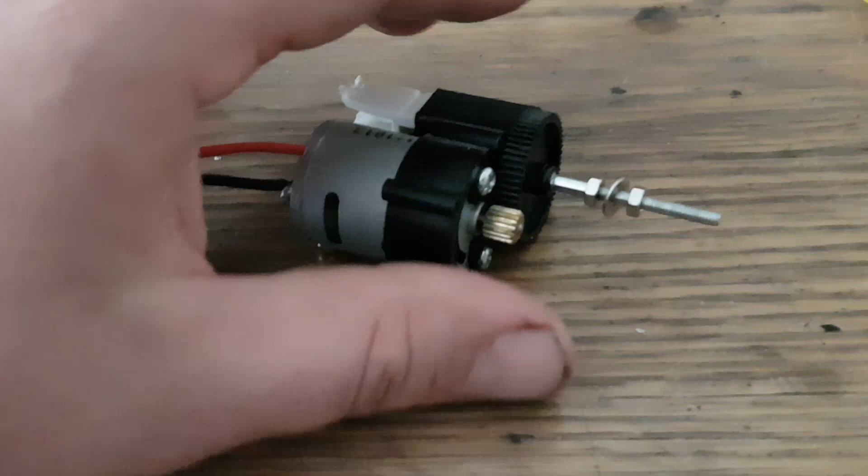Okay, so this is what we've pulled out of the plane. We've got this nasty little brushed motor. It didn't seem to have a lot of power, but I'm not entirely convinced it was the motor's issue, although the motor does have an issue - I can turn the prop at some points and the motor itself doesn't turn.

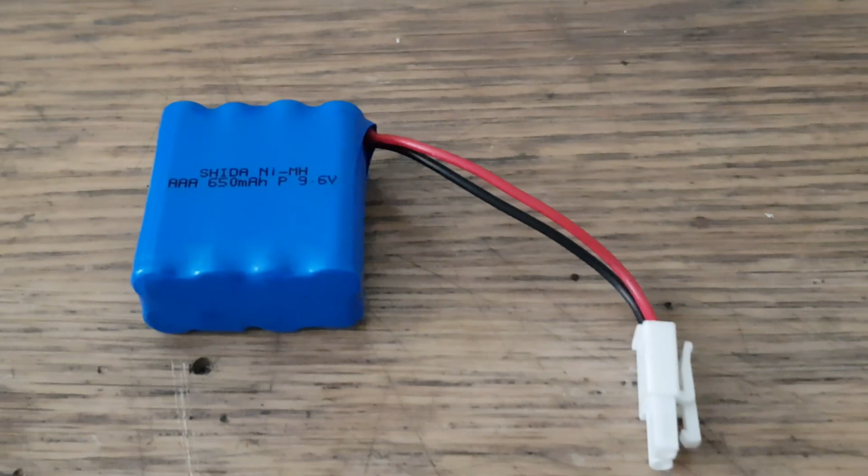Yeah, that's the massive power pack, as you can see, 650 milliamp hours. Loads and loads of time in the air - it ended up being about 5 minutes, 4.5 to 5 minutes. Yeah, bin.

Next we've got the receiver, which was, if you can see the great big long line, some 72 megahertz thing, and 5-wire servos because it had its own little autopilot. When I say autopilot, it had a board that meant you couldn't actually fly the thing at all. When we tried to fly it, it wouldn't trim, it wouldn't fly level, it wouldn't fly, it just kept crashing all the time. So yeah, bin.

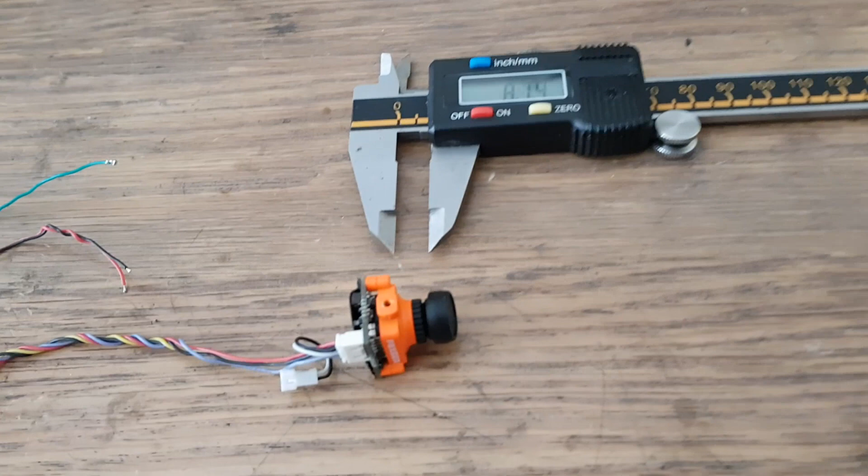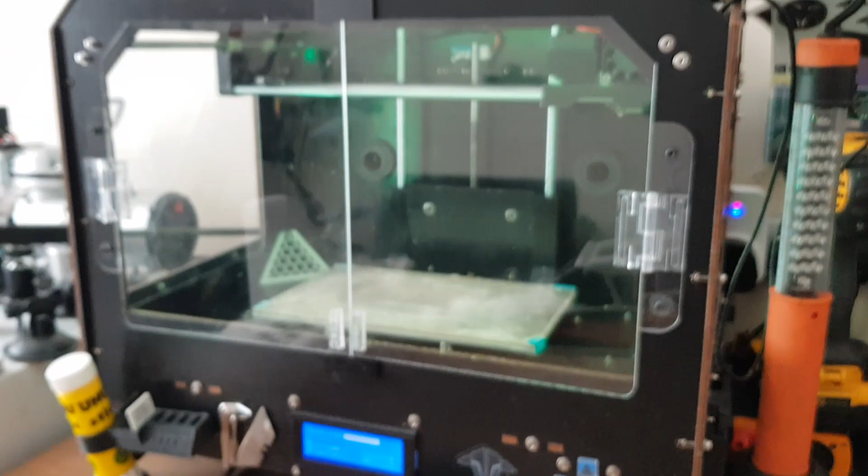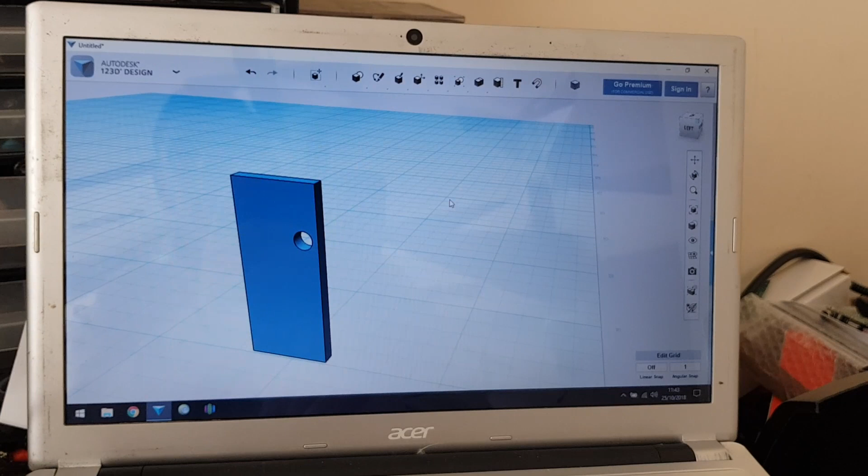Right, so what we're doing right now is this Foxeer camera. I didn't realise quite how small it was when I ordered it. That's going to be going on top of here. So we're just heating up the 3D printer and making up a little bracket or stand, so that's going to sit on that side. I'm just going to put a hole in it now, extruding this surface through there to make a little hole. Might as well clean up the edges while we're at it before I copy it.

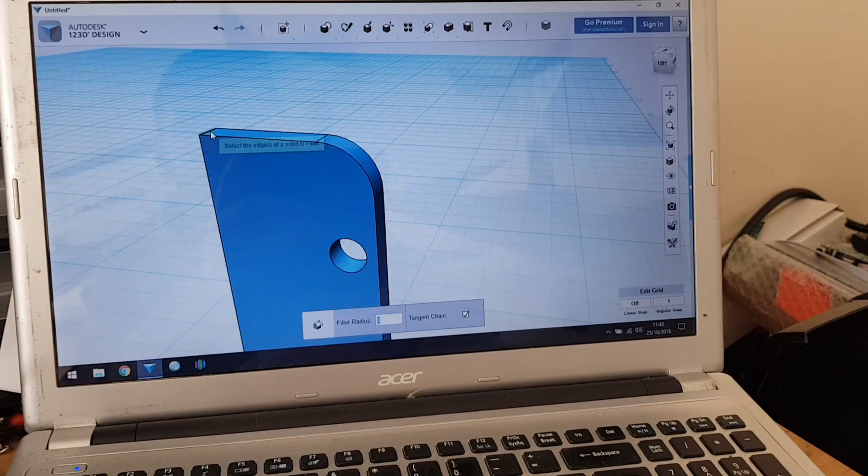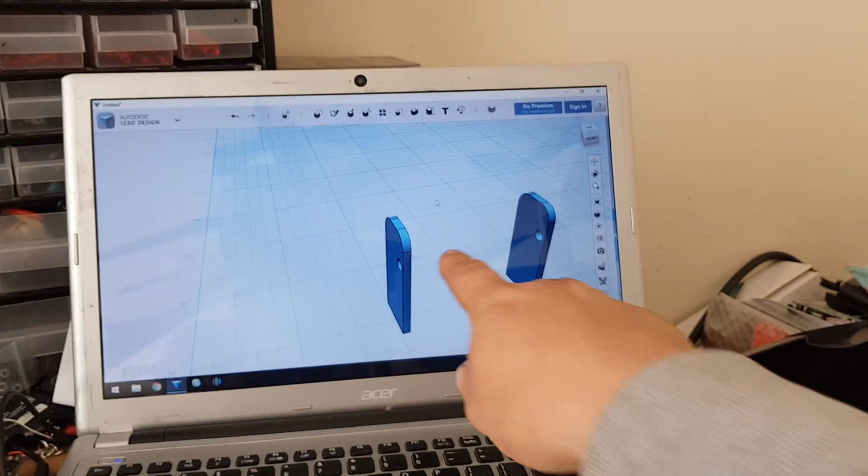This is a prehistoric computer, so it's struggling like hell - struggling, I can't even say the word struggling. Right, we'll zoom out, copy and paste it, and then move that one over there. So the camera's going to go in the middle. I'm just going to make a piece for the middle, sit it on the printer, print it out, and join us in a sec.

Okay, so that's a simple design I've come up with, just as a test piece - really if it's any good, it's staying on anyway. It's got no drag to it really, it'll be facing into the wind. So the printer is now commencing, we have an 18-minute wait, so it'll be just after 12 o'clock, and then hopefully we can slit the top of it and glue it in where it should sit, hopefully proud of the propeller, but I don't know if it doesn't fit.

Tough, it's his first FPV plane, so right at the start I was starting with propellers in the shot and all the rest of it, so he can start at the start like the rest of us. Should be an interesting build this one, I like the look of it. I'm just not entirely sure how successful that's going to be inside, but we'll see. Spot the next modification: USB port, foam - have to cut that out next.

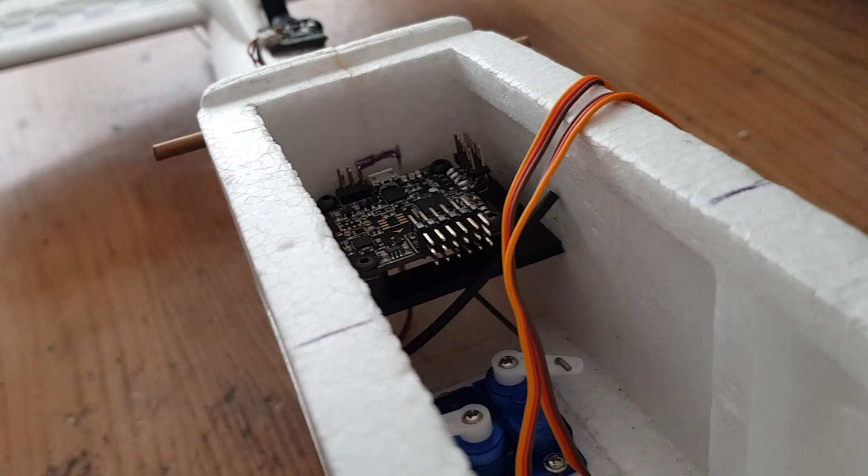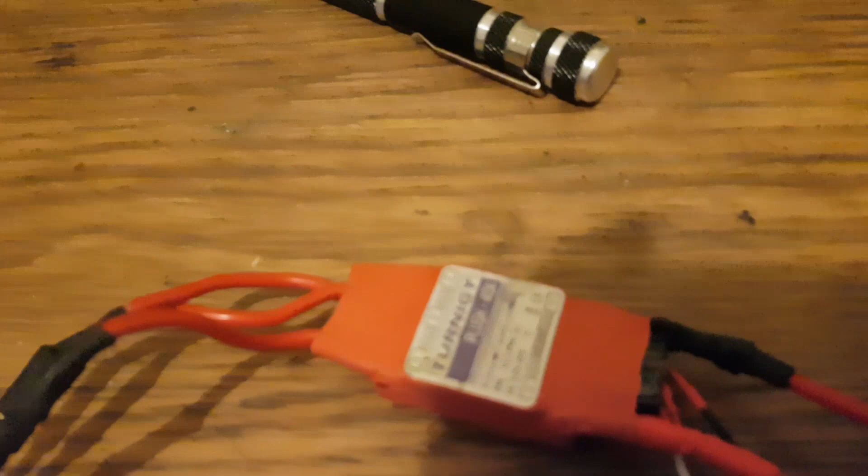Next piece of the puzzle: Turnigy plush speed controller. That's a nice controller, that. A servo tester and a battery. So now we should have a motor.

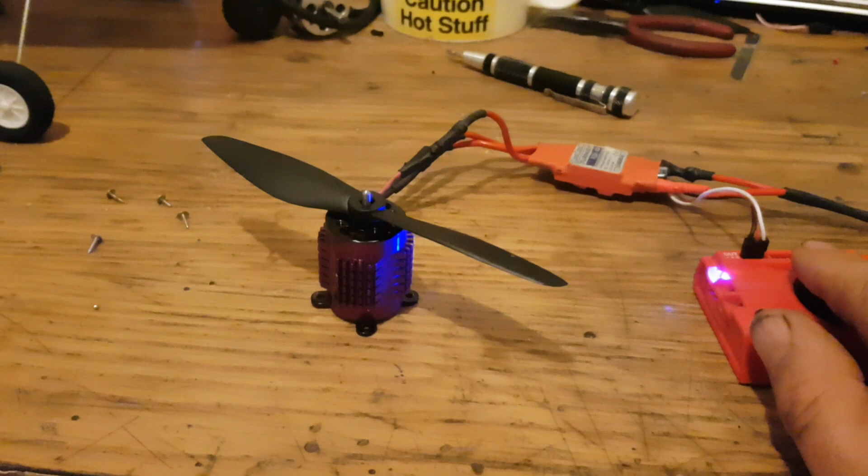And it's going the right way around. That's why the propeller's going that way. The propeller's on loose because if you put the propeller on tight, it would take off, obviously. So now all I've got to do is get all that in there.

Thought it was going to be a bit more of a squealer than what it is, but it isn't a squealer. It does blow a bit of air though. Yes, it pulls.

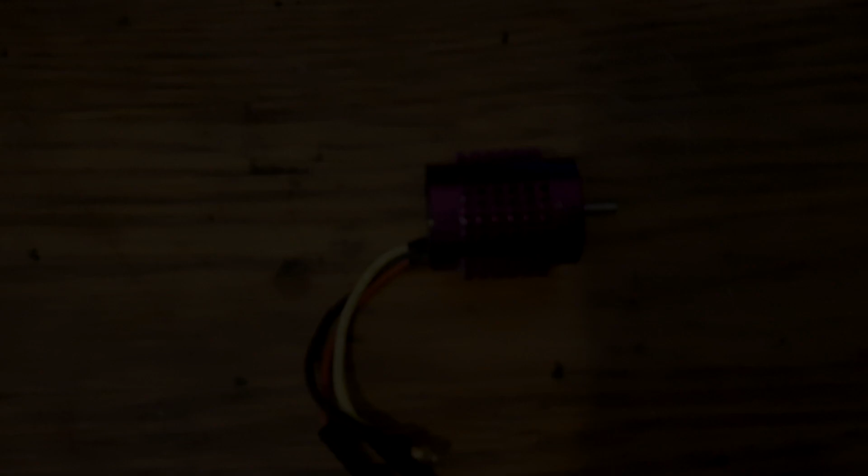Yes, twice as much power. Probably too much for you. The purple one probably would have done you great, but where's the fun in that?

So as the build continues, we've got the 2700 kV motor, which I'm tempted to swap because I think it is just too much power.

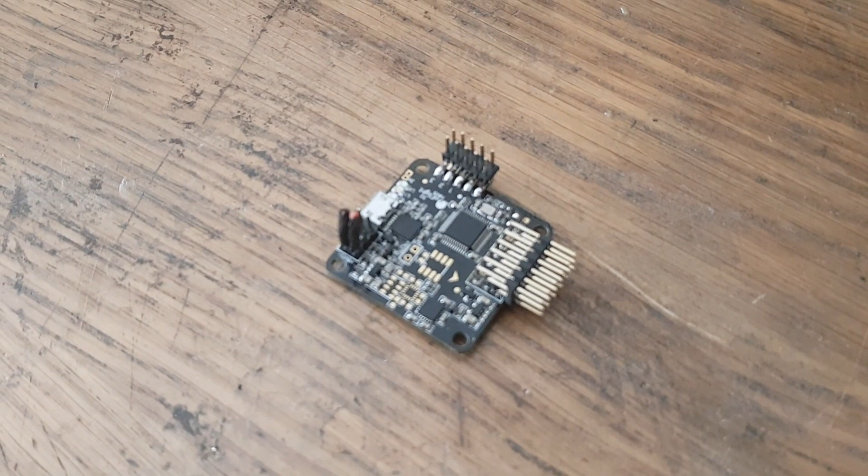We had a problem with the flight controller. This was the Naze32 that we're just going to hoy in. It did hoy it in, but has problems with its serial, and it's just old, outdated tech. So bye, in the bin.

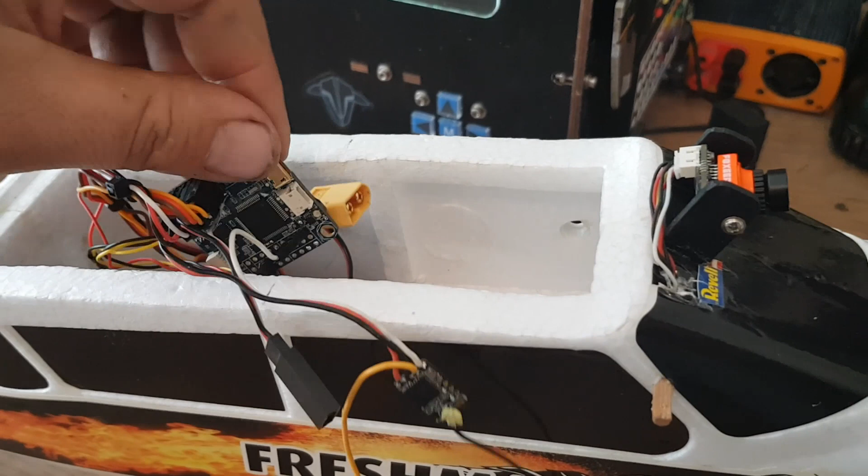What we're going to fit now, or what is fitted now, is an Omnibus F4 V5. It's the one without the current sensor. I wish I got the Pro now, thinking about it. So it might get swapped for a Pro after all.

So the problem was that the serial wouldn't read an SBUS receiver on UART 2. Yeah, UART 2. So all I did was soft serial it down, which is the white wire there, to UART 6. I've put it on UART 6 on a soft serial, so it's inverted. So it's inverted the inverted signal, so it's not really inverted. Yeah, go FrSky. So yeah, everything else is connected up.

I had the flight controller sat on this board here, and now I'm about ready to put everything in permanently. Yeah, there's nothing really much to glue onto the sides or to hold it. So I've just printed another one with some sides so we can shove some glue on the sides and have it stuck properly. And I'm just gonna get another one.

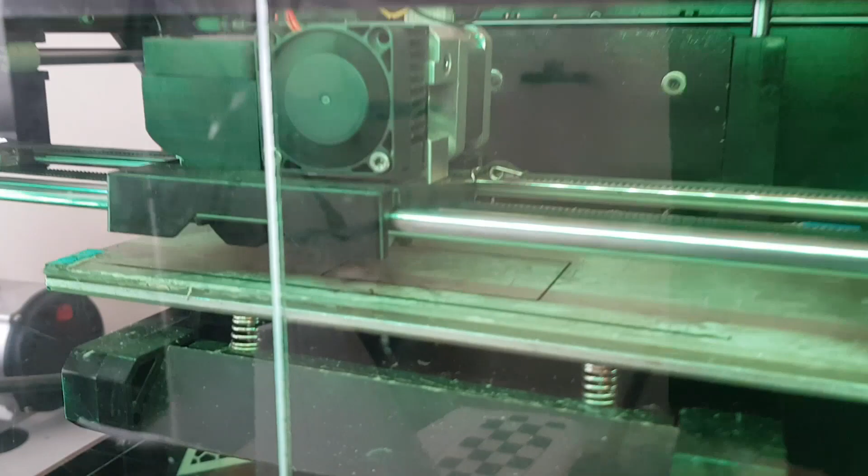Well, it's just starting now, just starting the print now, to print another one up, and that's gonna house the receiver on it when he gets it. Right now it's just got the FrSky one, just so I can set everything up.

So that's that. I've started on the wings. The wings were just solid. So what I've done, flip it around, is I've cut the ailerons out, put hinges in.

I'm going to put tape over it. Put a massive gap because I don't like ailerons that bind at all. So yeah, the horn's in, the servo's in.

It's just an old scrappy HXT 900. Same ones that are in there, but the ones in there are brand new. This one should be alright.

And then I'm just going to solder the wires together. And that's what this little chap's for. Going off the model mapping, I can't actually use any of the pins here for it, so I've had to go off channel 5, which is that tiny little pad there, but worked fine, no problem.

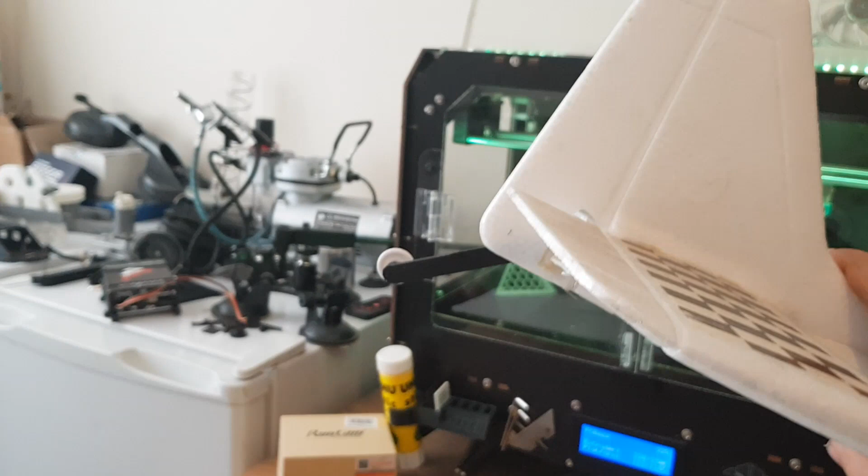So yeah, it's coming along nicely. 3D printed a little stand for the wheel on the back, but that wheel I think is no use, no ornament, but if it serves any purpose then fair enough, but I doubt it.

Yep, stabilization working. So you now have ailerons on both sides.

It's ready to fly, mate. It's ready to take up into the big blue yonder and set up the autopilot.

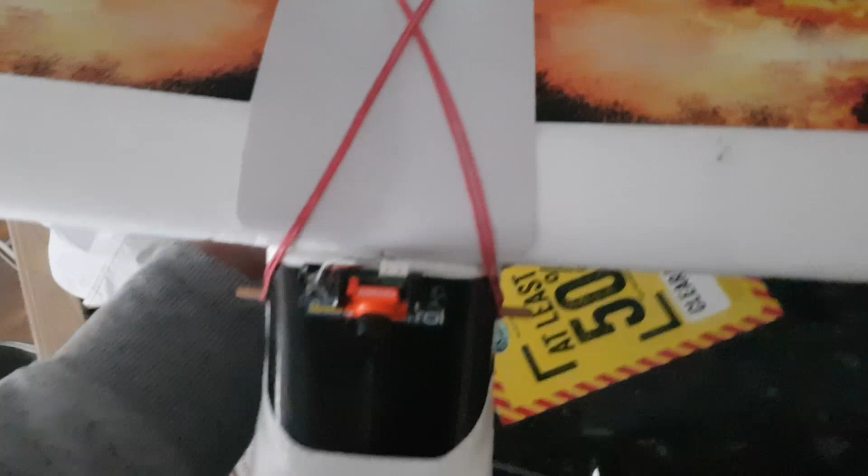Changed a few things as well, which I wasn't planning on videoing, but I'll show you here. Oh, the motor is far too naughty.

So we will have a Nathan setting and an Ian setting. The Nathan setting goes like this. That's as fast as the motor goes.

The Ian setting, and I might turn it down even more, but it means it should be much safer for you to fly. So, yes, that's it, mate. Whenever you're ready, it's ready.